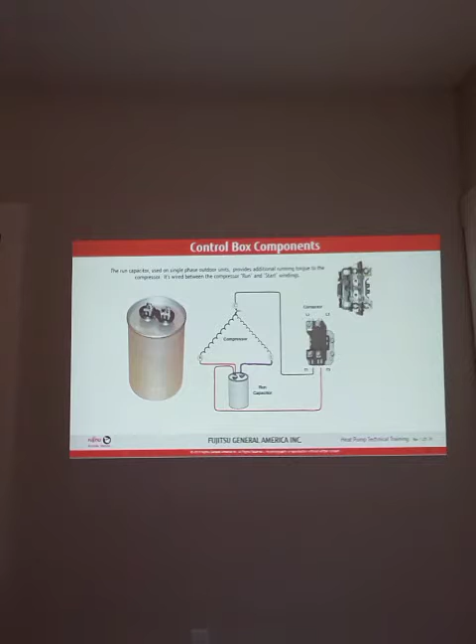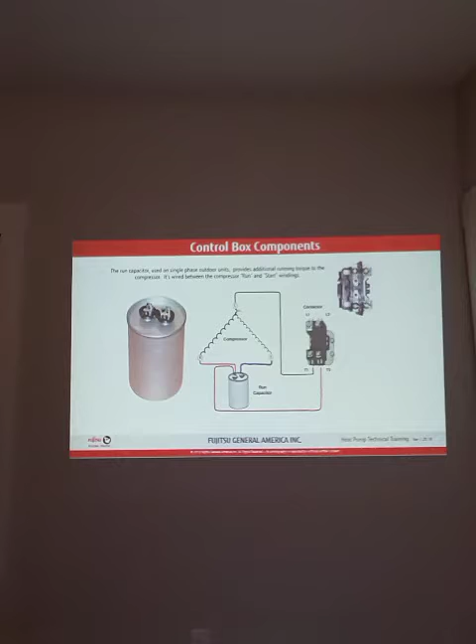And I'm going to tell you, 99 times out of 100, that's all it is. So just make sure you understand that even though it says run, especially for you new guys, just because something says something doesn't mean it applies to something that's run. That applies to the start winding, even though it's called a run capacitor. So it increases what? Efficiency, right?

In fact, this is a start capacitor or start assist. Back when we started doing this years ago, 13 SEER, about 10 or 12 years ago, a lot of TXVs came into play, and Carrier and Trane and Allied were saying we had to put start assist on anything with a TXV because the compressors, instead of having a 3 horsepower compressor in a 3-ton unit, became a 2 horsepower compressor, and so it needed a little ump to get it to start, a little help.

Now a start capacitor increases torque. A run capacitor increases efficiency. A start capacitor increases torque.

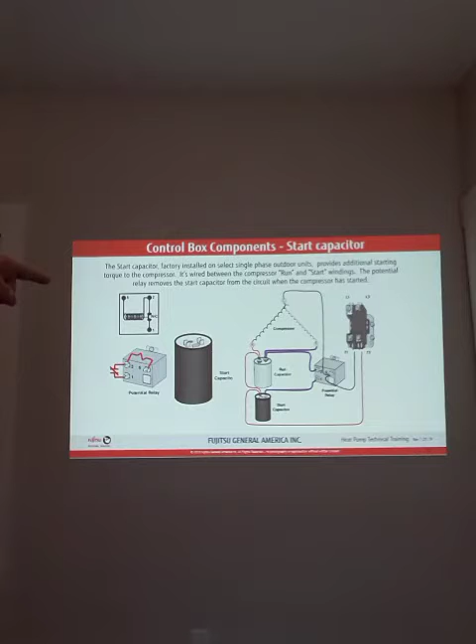And you see it has a potential relay. That's exactly what it means. You see it's hooked through the T1 to the common, and the other side goes to capacitor number 1. Then it leaves there and goes to T2, so it's powered that way. Then it goes back up to the run side, and back to the run capacitor, start capacitor, run capacitor. So that's how you wire one.

It's very, very simple. Now we do have things you can just plug into the start capacitor, you don't have to do all these things. It already has a potential built into them. A lot of manufacturers complain about these things, even though I've had no issues with them myself in the field for almost 50 years. They work very well, and they've gotten better over the years.

So what this does is help the compressor start 100 times faster.

Sometimes I go on jobs and they say, Butch, this is blinking. I go up there and look, and maybe it's a 1970s or 60s model home with a 100 amp service. They're trying to do dual fuel or whatever. I look at the wiring, the electrical box, and it's got screw-in fuses and cartridge fuses, and the wiring is old cloth wire so diminished it's unreal. What you need to do is have a serious talk about the electrical upgrade they need in their home for safety's sake.

It doesn't mean you're an electrician, you're not, but you can give advice. You can also put on a hard start or start assist, that's sometimes what you'll hear on the NATE question test. Start assist is nothing but a hard start with a potential relay, so it starts faster. Now it's still going to blink, they just can't see it, it's so fast. That's all it is.

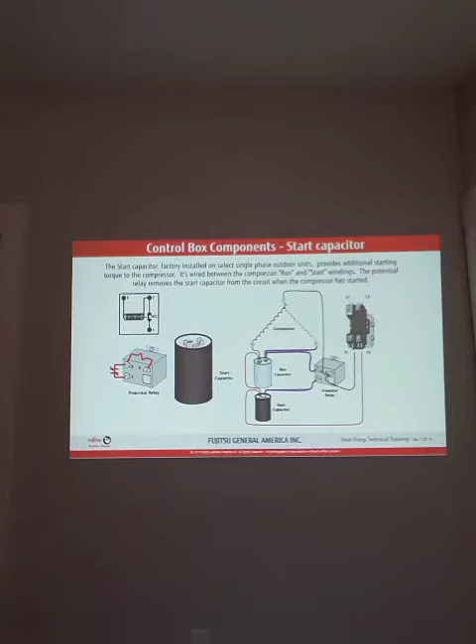But it helps you resolve an issue until they can get their electrical system fixed. Advise people when you see something of safety like that in order to get it repaired, whether you're in that business or not. There's nothing worse than leaving a job and having a house catch on fire, something tragic happen, and you were just there. Even though you may have had nothing to do with it, it's very good to advise people of these safety issues, no matter what it is.

So wiring - we want to talk about thermostat wiring to an outdoor unit, from the indoor to outdoor, to the air handler or gas furnace. As you see here, the low voltage control wire should be 18 gauge. Now if you take some tests, you could be at 24 gauge, but it's only like 20 foot long, down to 14 gauge, which is 250 foot long. But anyway, length longer than 100 foot should be 16 gauge.

So this is Fujitsu's recommendation. And I would always put on a heat pump the outdoor 8 and indoor 8 wire. You never know when you're going to need an extra wire. I've been on many jobs where a wire is broken from the indoor to the outdoor, and you could find one wire that was good, and now you're not having to pull a whole bunch of new wires. It might help the guy who comes after you. We want to help each other in this industry if we can, I believe. So let's do that and use that.

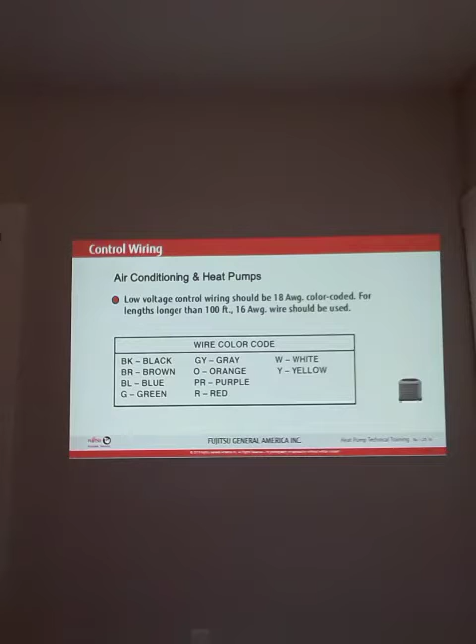I would at least put 8 wire to my stat too. Even if I had a straight AC, which only takes 2 wires, I'm going to pull 4 out there just in case I ever have any issues.

So here's how a thermostat's wired, as you see this thing - this is a heat pump stat. It's filled, you see B, right? Remember, Fujitsu is like Rheem, Ruud, and Bosch - it energizes during the heating mode and de-energizes in the cooling, not fails, de-energizes. So you see the B, and it goes to the air handler and out there.

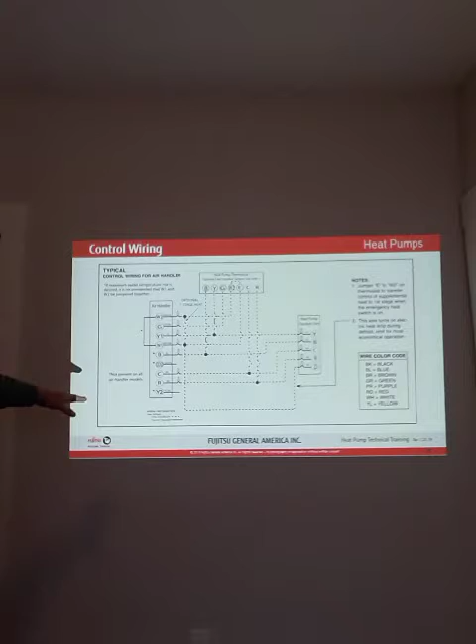So actually, if you look at these things, that's your first stage of heat right there from your heat pump, and you see where it goes out here, right to this place. And then also you'd say, well, here's Y1, and of course Y2 if you have a 2-stage here, and it goes to both. Depending on whether it has an ECM motor, a variable speed motor, or a PSC motor, the air handler and gas furnace needs to know what speed the air needs to be. It will know what mode it's in, whether cooling or heating. And then you see G, and then you see W2 right here.

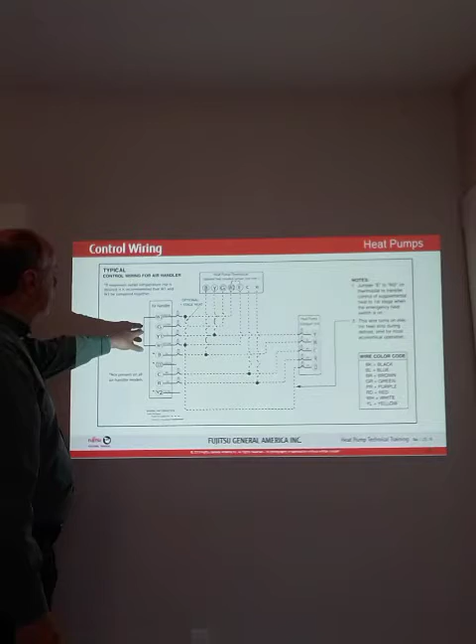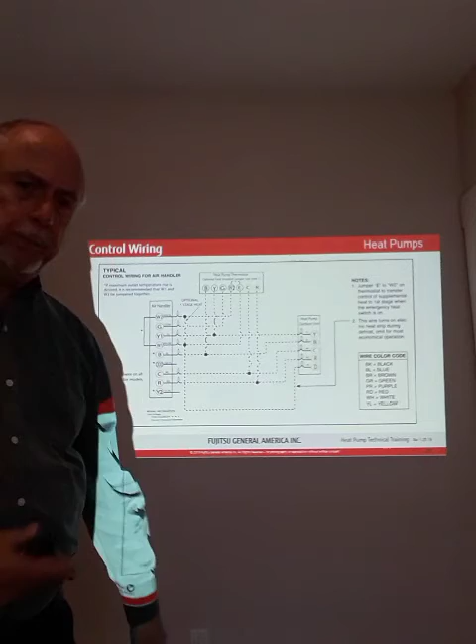W2 auxiliary, right? And you see E right here with this one. Now as you look at this stuff, you'll see a jumper up there. Now, not every stat has to have a jumper, not every one. So you got to know your stat. I get calls on stats all the time. In fact, if I took a look at some of these stats...

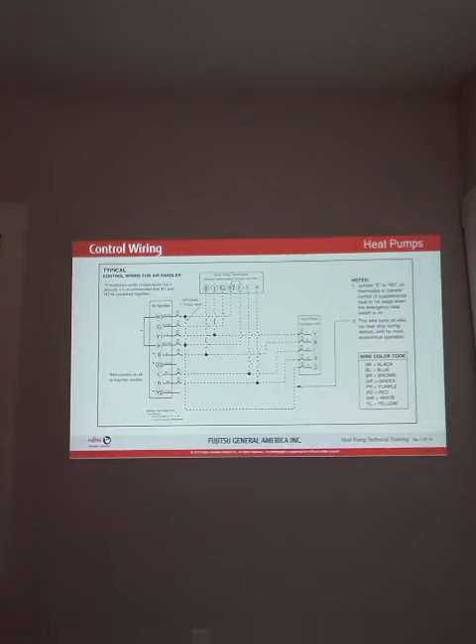Let me turn this right here just for a minute. Let's take a look at this stuff. So let's say I'm looking at a Pro 1 heat pump stat, cooling or heat pump. This will do, I think this is their 85 model. T6 100, yeah, TH83, right? So it's a touch screen, right?

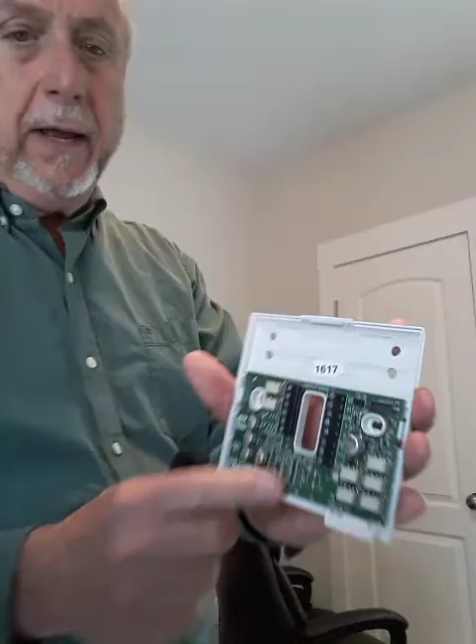But if you look at this thing and how it's wired on here, you look at this one, and I'm just trying to show you here a little bit how this thing is wired, and you would see it has an auxiliary and E on the heat pump side. In other words, it doesn't have a W2 and E. It has auxiliary and E on one terminal. So it's already programmed into this stat, so there's no jumper needed with this stat. No, not at all. Now, not that that's bad, it's not bad, and not that this is good, but Pro 1 has already taken some things to do that, right?

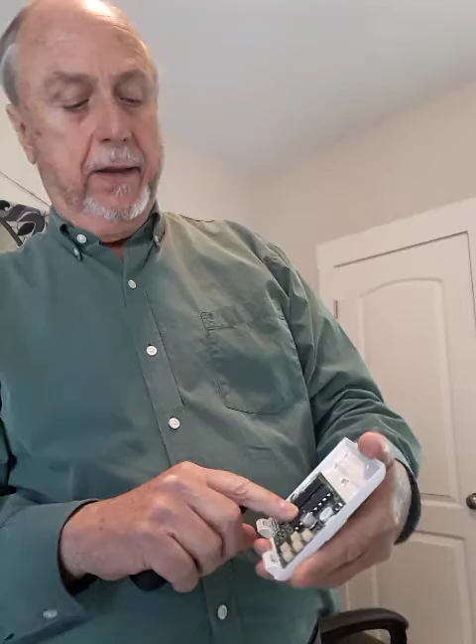In fact, you'll see on this other side, conventional-wise, it's got W2, and then so that would be your gas furnace. But on the heat pump side, it has E and auxiliary on the same terminal instead of W2 and E, right?

Now, if you look here at this, and this is what I have, and I'm not going to take it off my wall because it's a T10 Honeywell, which is Wi-Fi, it's all these things and stuff. And if you look at it, and I say, well, look, it has auxiliary and E, so it would need a jumper, but the jumper wouldn't be W2 to E, it would be auxiliary to E.

So what's the name of the story? The name of the story is you need to understand and read, see what kind of stats you got. I get a lot of calls and they say, Butch, my emergency heat doesn't work, and the whole time it needed a jumper, right? And that's it. And then I get another call, where do I put my jumper? Well, you got a stat that doesn't need a jumper, so you don't need it, right?

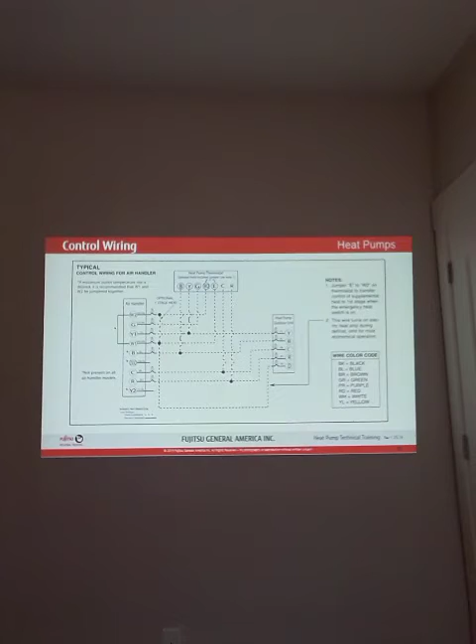And you can put it on the indoor too, but then you would negate the staging of that too. So anyway, saying all that, just to make sure you understand what stat you have when you start to wire these things, right? So there it is, and you see right here, you see the D right here.

A lot of people use E, or W here on the defrost. That is to temper the defrost heat, because the unit goes into cooling to defrost, and to give you a little heat so you're not freezing to death while it's going on.

I get a lot of calls, especially with our premium brand, our dealer brand, Braun, and with our air temp. And it used to be very bad, but it's a little better now, because they have a W2 in and a W2 out on the outdoor unit, and that's the temperature. The W2 out goes, but the W2 in is on the same side that everything wires in. So guys were wiring it to the in, and it did not work.

It would not temper defrost, so every once in a while I'd get a call, say, Butch, the homeowner says in the middle of the night they'll get up and the air conditioning's on. And what it is, is that they didn't wire the proper terminal on the outdoor unit to temper the defrost on the indoor, on the air temp and the Braun. So they thought the air was on. The whole time it was just a miswiring, not following the instructions, not being ugly, because things happen.

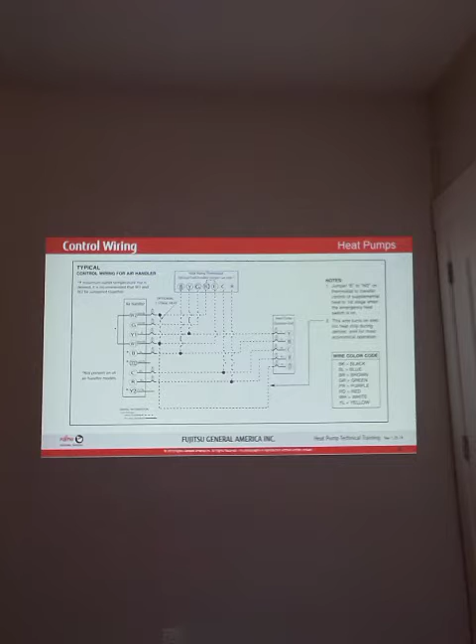I've done things myself where they didn't do that. So make sure it's always out, O-U-T, on the outdoor unit when you're taking it back to the air handler, going out the outdoor unit to the indoor unit, going out, not coming in. The in is only used if you don't want to do balance point with an outdoor thermostat. So make sure you understand that if you're putting in air temp or Braun, right?

Now, you don't necessarily need an outdoor sensor with all stats. On my T10 at home, I don't need it because it has Wi-Fi. But if you have a homeowner without Wi-Fi, you would need it. In fact, on this Pro series I have, you do have an S1 and an S2 sensor.

Now you can program it for dual fuel by, when it asks you a question, fossil fuel, right? It does have a program inside it: if it runs too long and doesn't gain heat, in other words it doesn't start satisfying, it will bring on the fossil fuel. But you have to program that in there. And so does Honeywell too.

But for a lot of them, it's best to have a sensor. That way you can lock out or bring on certain things at certain times with the stat. This one obviously needs a sensor, and the Pro 1 could use a sensor too, in order to make the unit more efficient and work properly.

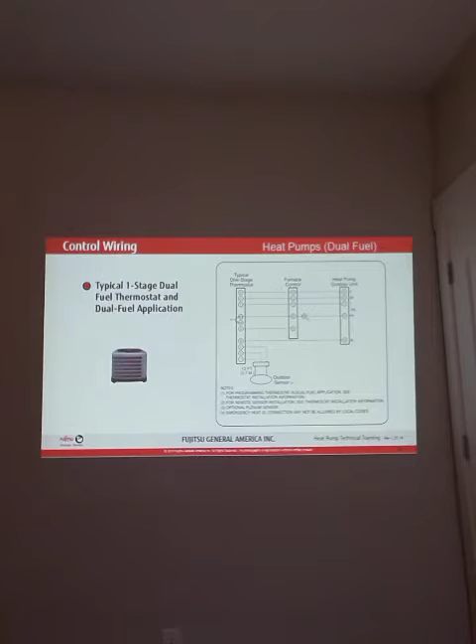Now doing dual fuel, I was involved with one of the first dual fuels. I was in Mountain Brook, Alabama, and it was a Trane unit with a thousand wires and about five boards. It took a day and a half to wire it. I'll never forget, I think I had a full head of hair and was about 28 years old. But it was very much an adventure at the time.

But these days, all I have to do is push on this one, or even on that one, and put fossil fuel. It'll ask me what kind of fuel, and what do you do? You wire it the same way you wire anything else, from a gas furnace to W to all the things. You wire it up, and then when it asks you what kind of auxiliary fuel you want, whether electric or fossil, you push fossil, and that's it.

Now, I'll be honest, there's still products out there where you can get a lot of boards and a lot of wires and do a lot of stuff. I'm always a proponent that the less boards, the less wires, the better.

So I'm going to encourage my customers, my service guys, and even you guys, to go in there and buy a good Pro One or a good Honeywell, and program it so you're not adding extra wires and doing extra things in order to get dual fuel. It's so simple now, it's unreal.

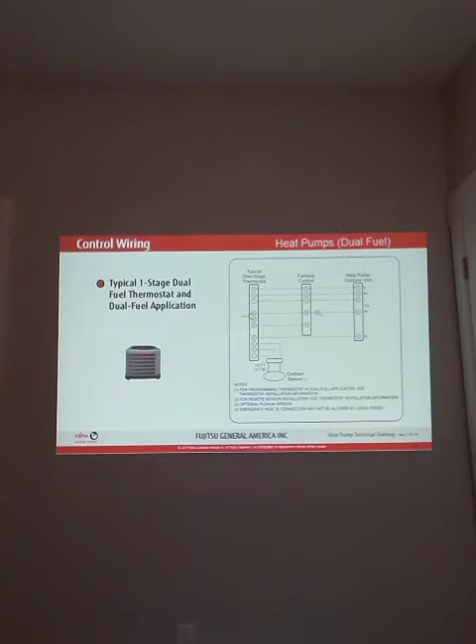And I think that's one of the great things about electronics now, is we can do things and it doesn't kill us while we're trying to do it, or work us to death trying to figure out more wires, more boards, more stuff, and more things to go wrong. So anyway, that's about where we're at with wiring in this segment. Now let's talk about airflow.

Airflow is very, very important. I'd rather test than guess, and you can test airflow, so we're going to look at some of these things. I go on a lot of jobs and they'll tell me it's a piece of junk. Like I said, I take refrigerant readings, they tell me it's a piece of junk, and I look at the ductwork and say, oh my God, look at that ductwork. It's amazing how bad it can be.

I've had many guys, let me turn this back here. Had a guy the other day say, I took out a 3 ton and put a 4 ton package in. I said, how was the ductwork? He said, what?

And I'm not being ugly or anything, but we have to understand that when we apply a unit, it always has to be applied to a certain structure. If I have an air handler and a condensing unit, or a gas furnace and a condensing unit, and I put in a larger size without evaluating the ductwork, how much ductwork is on the outdoor unit? Well, none, right? None. So if I have diminished ductwork, smaller or even larger, now I'm out of balance.

That unit outside is moving enough air because it's brand new and it's clean, right? So if I don't have enough air on the indoor air handler side, then I'm out of balance. Nothing's going to work right, my charge is not going to be right, and a lot of things are going to happen. I go on a lot of jobs and I will evaluate the duct system.

Sometimes you have to have an honest conversation with a homeowner about their duct system, their filters, filtration systems, all these things. I want to have a class on that in about two weeks. We're really going to take a look at how to evaluate a duct system and come to the place where we can talk with our homeowners intelligently, showing them papers and engineering information so they can make a good rational decision instead of me just saying it's the wrong size. You understand? Because already homeowners think we're all liars, and we're not. We want to be honest.

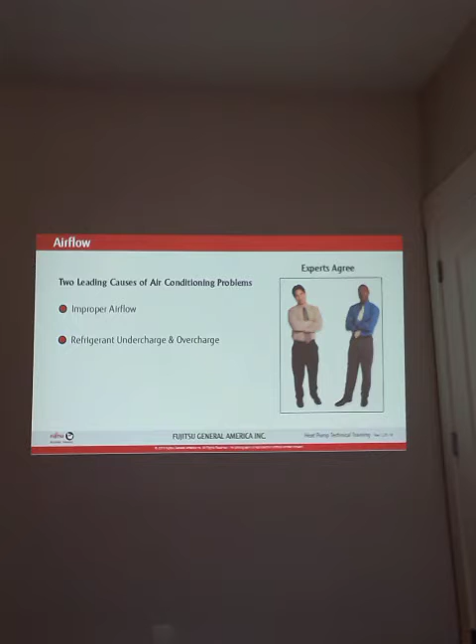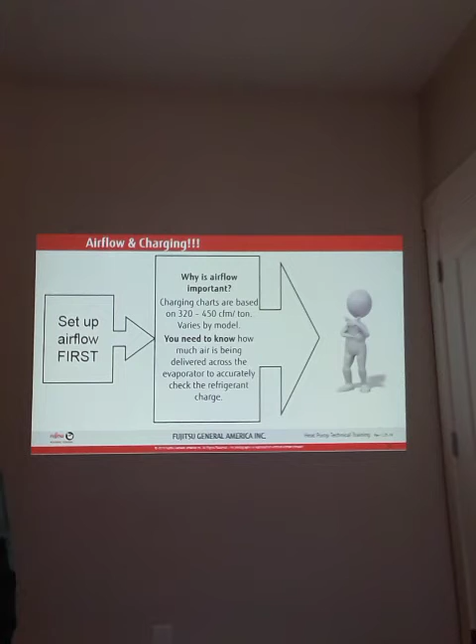Proper airflow and refrigerant charge are absolutely synonymous. You cannot have a proper charge without proper airflow. It'll never work. Your unit won't be a 16 SEER, 15 SEER, 14 SEER. You'll not have the proper energy, nothing, without proper airflow. So to set it up, first at 320 to 450 — all my life it's been 350 to 450. There's another slide, so don't get confused. It says 375 to 450, and that's okay. But anyway, we need to have the proper airflow or the charge won't be right.

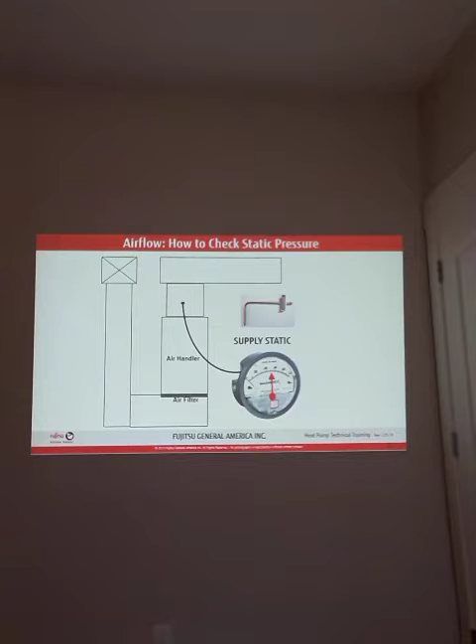So how do you test it? Well, this is a manometer, right? A manometer, or manometer if you live down south. What we're checking is the positive — and you see this thing is running, I have a little over 0.5. Then I have a negative, a little over 0.2. Then if I go to the whole thing, I've got a 0.7.

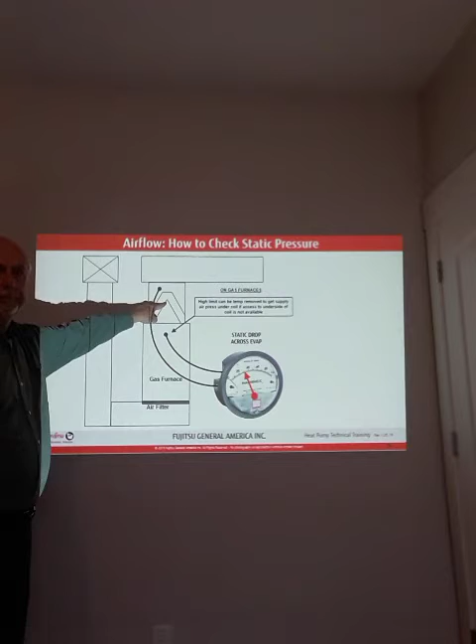So now I am testing the airflow according to an airflow chart. And then I'm testing a drop across a coil, which I need to test. I can actually tell if a coil is dirty by testing this and seeing if it exceeds that drop, right?

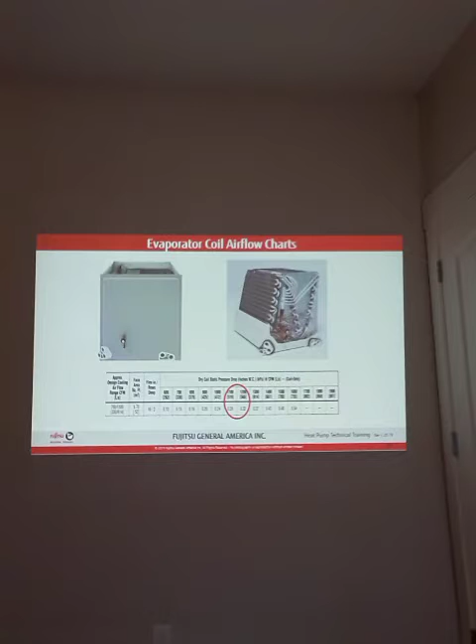But saying all that, what if I looked at this chart and it said 60, 70, 80 instead of 32 on the 1200 one? What if it said 1-point-something? What if it said any of these things? That would mean there's something going on with that coil — something's stopped it up, right? So now I don't have to take it apart to see. I can just test it with my manometer to make sure.

Now this is actually how you test a gas furnace or an air handler. You get it beyond all the stuff to make sure that air handler, that one appliance, is putting out enough air. You see 0.7 here — so this is putting out 0.7. Now this is just a test. This doesn't mean this is right.

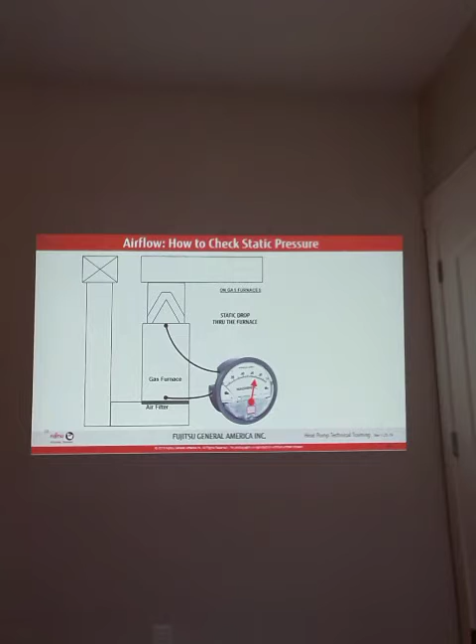All units have a thing — motors have a thing called static horsepower, right? You'll see that on some NATE tests. And all of them are applied at 0.5. In other words, this unit is able to overcome 0.5 static. It can get more or less and you'll diminish certain things, but at proper airflow, proper amps, and proper energy, it's going to be 0.5 on 99.9% of the equipment. I think Trane one time tried to do 0.3, but it didn't last long, right?

So you see, this is what it's doing when it's doing it. On the top one here, right here, I have a PSC motor — you see the low, medium-low, and all the speeds there. And if I just had that 0.7, I can say confidently that I have 1195 CFM coming through that unit. Why? Because I had 0.7.

I looked at my airflow chart, my data performance, airflow data performance chart, CFM delivery chart — and if I've got a 3-ton unit, can I live with that? Yeah, I absolutely can, it's going to apply. Now if I've got a 4-ton, I've got some issues, don't I? Absolutely, I can't live with it. If I've got a 2-ton, can I live with that? Well, no, in fact I need to change some speed taps and stuff. And in fact, if I was at 987, I would be a 2.5.

If I was, I'd be on medium high at 7. But if I change the speed, I'd also change the static. And you see, the lower the static, the more CFM. The higher the static, the less CFM. So it's not good to get past that 0.5, in my opinion.

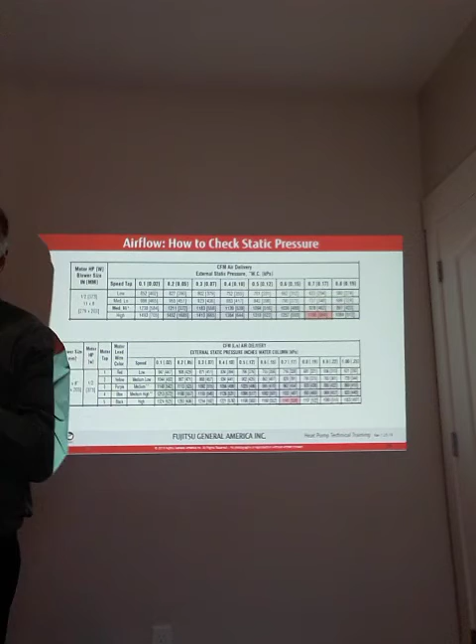Now, if I had a 2.5-ton unit or a 2-ton, I could put medium low, and it'd be at 843, which means my unit would be efficient at that, running to 0.5. And I would not be overamping or making my motor do more work than it should.

Now the next one down here is external static, and you see it's an air delivery, but you also see the motor, and it says it's a half horsepower. That's the size of the wheel, and then you see 1, 2, 3, 4, 5. So this actually is an ECM motor, but it's got little taps right here of 5 speeds on this stuff, right?

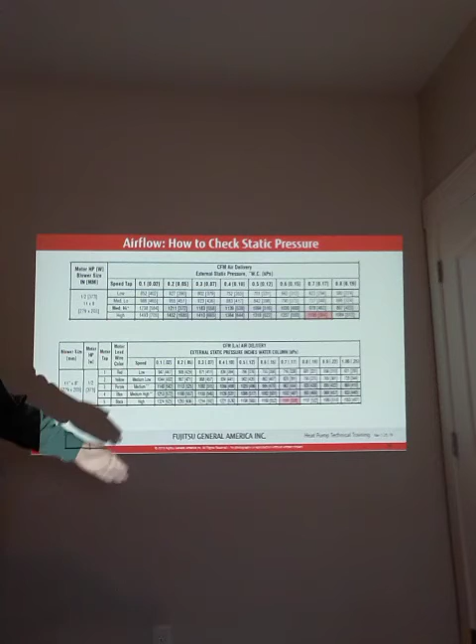And so you see the static on here. The constant torque motor has a static. The variable speed does not have this. So it was about whether you plug it in or whether you use a board with dip switch setting. But you see 0.7 with this particular unit is 1141, right? And you see the higher the static, and you see it goes up to 1.

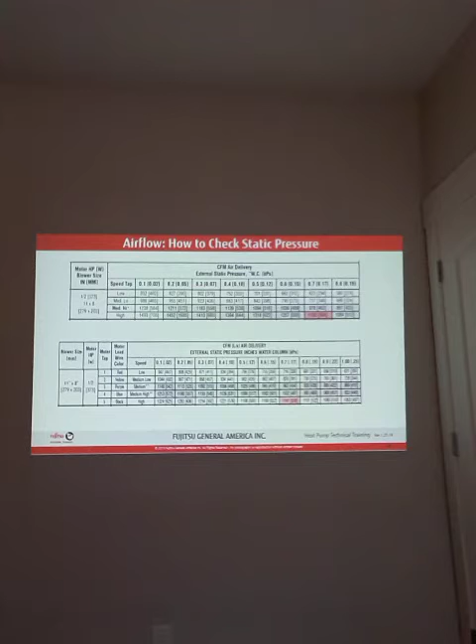Now most tests, NATE tests and state tests, will tell you they'll ask you a question: what is the highest static on a blower performance chart? And the answer is 0.8. A lot of guys put 1.0. That's not the right answer. ECM, yes. PSC, no. So make sure you understand that.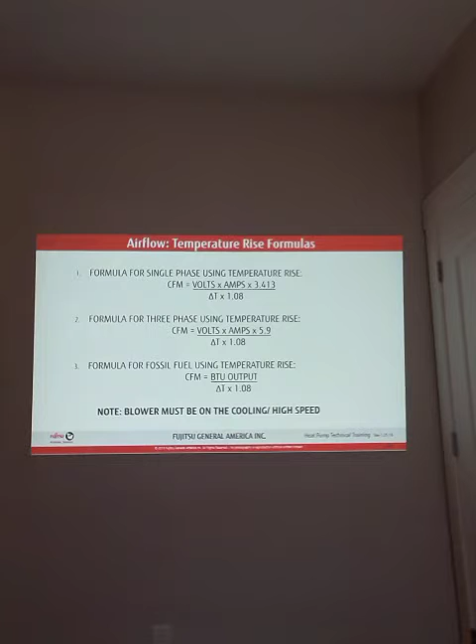In fact, if we move on here, I can show you some things that I do all the time as a tech guy and helping you guys do stuff. And I use this formula constantly, right? In fact, you see this, it's 240 times 40 times 3.413.

Now, some manufacturers and some engineers use 3.414, right? 3.4, 3.414. But this is point, and that's just no big deal. So now I get the BTU output, right?

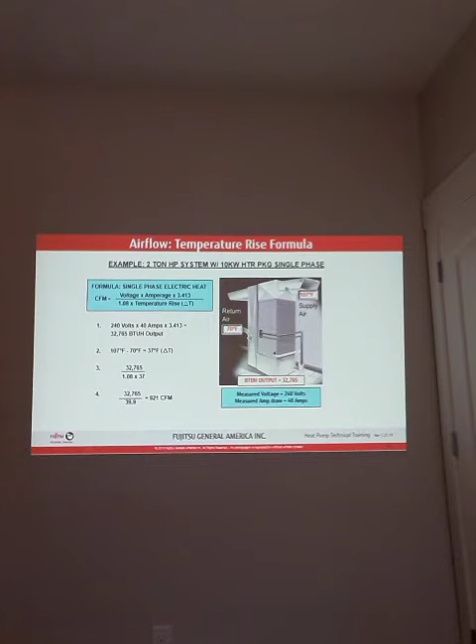So I've got my voltage, whatever my voltage was here. And let's say this one was 240 times 40 amps. And then you said, well, I got my watts, so that gives you watts. Amps times volts equals watts. And then I times that by BTU. So now I've got my total BTU output, right? At 32,765, right? And so now I do a delta T.

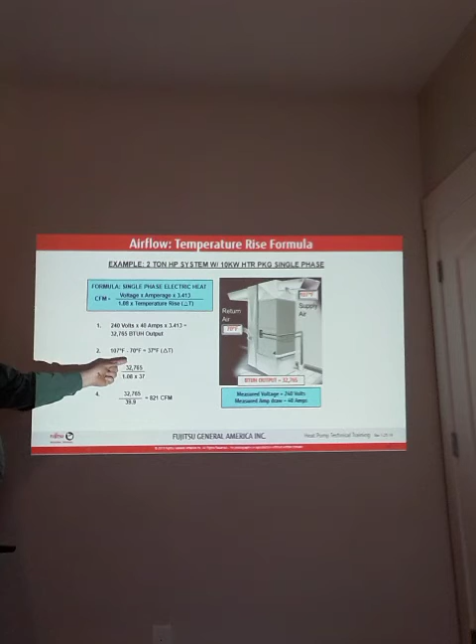So now what did I do? I got amps times volts, right? Equals watts times 3.413. Now I've got my total BTU output, right? And so now I got to get a delta T. I went in at my return, all right, at 70. I came out at 107. So now I've got a 37 degree, right?

And so now what do? Well, I just take that 3,000 and I take that 37, right? I take that 37 and I time it times 1.08, which gives me a 39.9. And I divide that into 32,765, which gives me my total CFM.

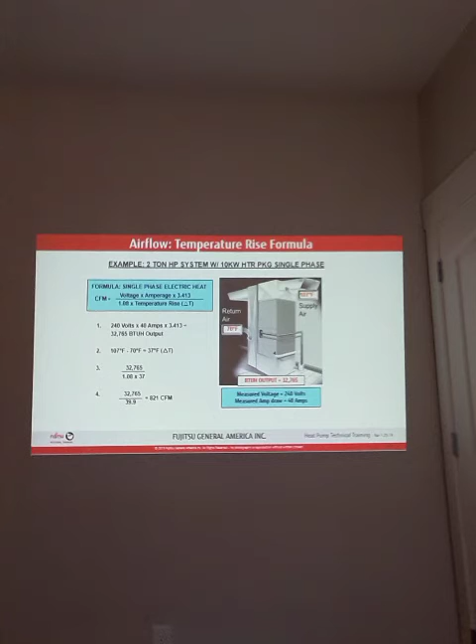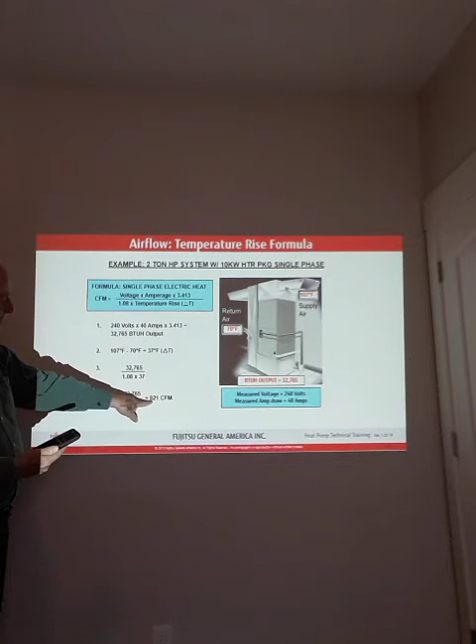Get your delta T and determine exactly how much airflow is coming through an electric strip heat furnace. If you got BTU output, let's say a 100,000 BTU gas furnace at 80%, that's 80,000 BTU output. I can do the same thing with that. It's all about BTU output. Then what? Delta T. BTU output, delta T, right?

1.08, below 1,000 feet of elevation, that's your correction factor. Times it, then divide it. Times it, divide it into your BTU output, and you're done. Then you know exactly how much airflow.

The last one I went to was way up in Decatur, Alabama. The guy, they'd been out there 10 times. I did one with 20 kW. I didn't put it on high.

I always want to know what it's doing when it's doing it. Let me say it again. You'll get a lot of training, they'll tell you put it on high to C, A, B, C, or D. Well, we're trying to fix a problem, an issue. So what I do, I leave it exactly like it is, and I do the test then. Then I can determine what it's doing when it's doing it.

Now that's pretty good, that's testing. That's not guessing - I think the airflow is good. I get that all the time. You don't have to think. I can do a heat rise and know exactly what it's doing, right? And then I can apply my refrigerant charge and all the other things to the structure, or the problem I'm trying to resolve.

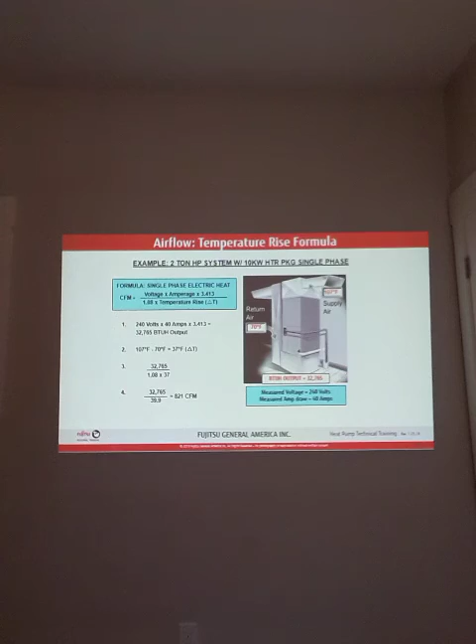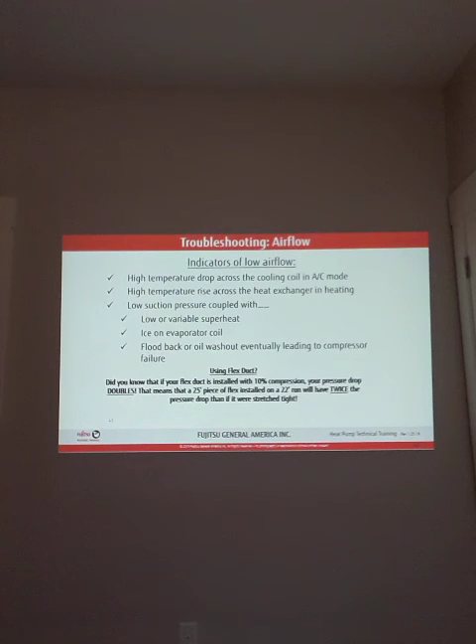So let's finish this up a little bit. I know I've been going on a little bit, but it's very important. Same thing if you're doing a gas furnace - here it is right here, a gas furnace. It doesn't matter, as long as you have BTU output, you can determine it. So high temperature drops across coils, low superheat - if you don't have your airflow right, there's going to be a lot of stuff. Your superheat will, if you don't have enough airflow, go to nothing; too much airflow, go way high. You have to understand that this has an effect upon all this stuff, and so you got to be very, very careful with airflow in order to get your charge right.

So, saying all that, let's see how long we've been going here - 30 minutes, wow! I'm going to stop right here, and I'm going to tell you what, we're going to get into piping and charging next. I think it's probably my second most common call.

The most common call I get is piping, and well, actually charge, because they overcharge usually, especially with microchannel product, the Airstage. But understanding Airstage, the microchannels - I got a lot of customers very, very successful because they make sure they take care of the little nuances. And I know even with Fujitsu, you take care of the little things and it'll take care of you.